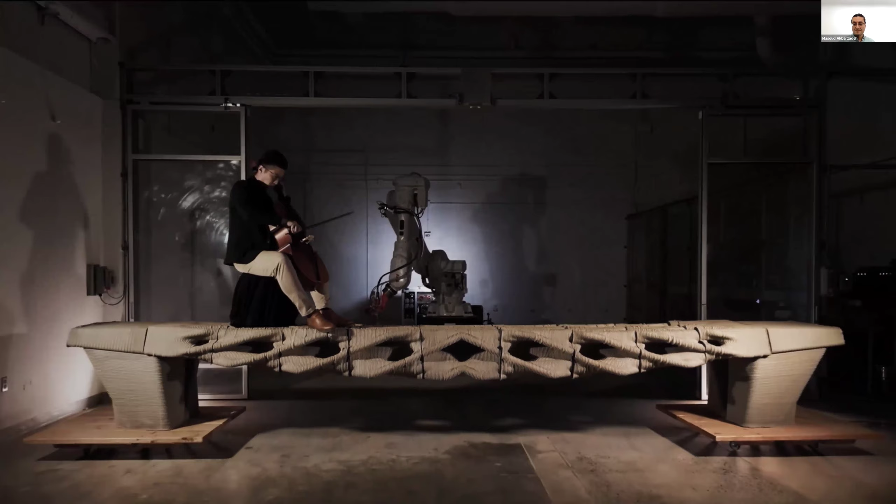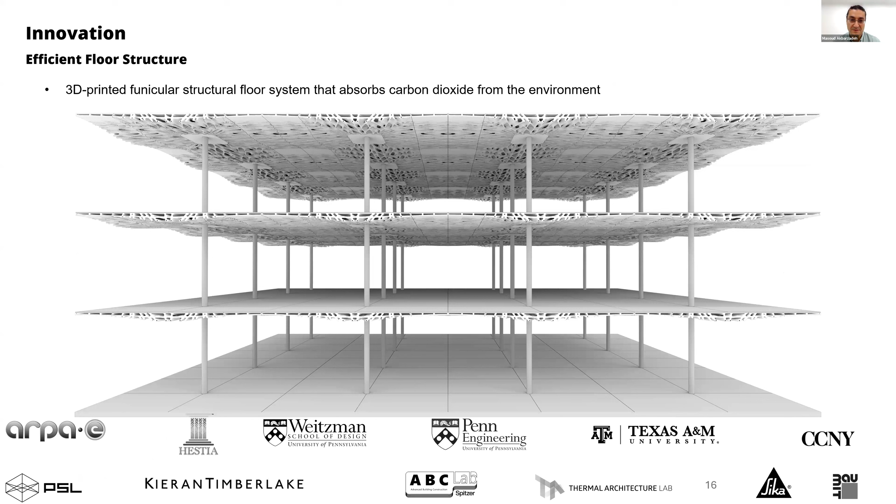This research is at the core of an ongoing investigation, a collaborative investigation between multiple co-PIs and myself, funded by the Department of Energy. What we are doing, the innovation, is that we are looking into a 3D printed structural system that has minimized mass and maximized performance, and that could also absorb carbon dioxide from the atmosphere.

So the innovation is, well, first of all, we have multiple approaches in order to reduce carbon emission. The first approach is the design, and how we can minimize the amount of material we need for construction of these innovative structures.

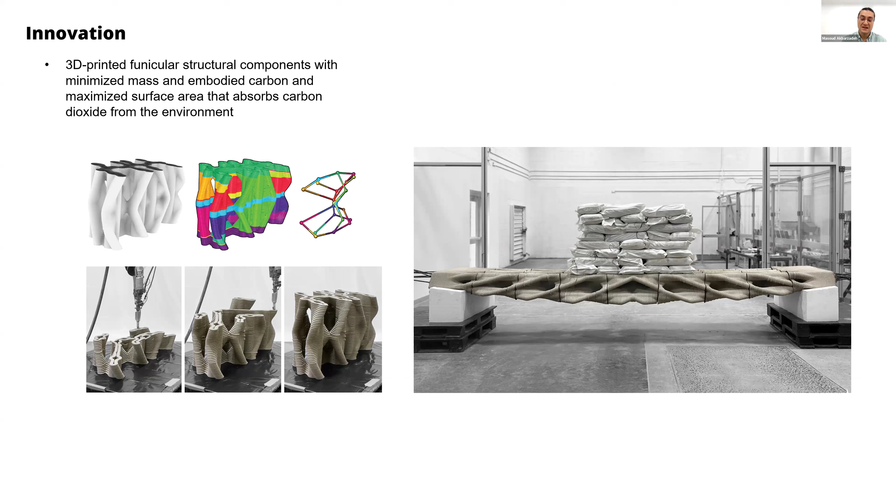We take advantage of concrete 3D printing because it would reduce waste. It would actually add to construction speed. And we can achieve complexities that are necessary for efficient structures.

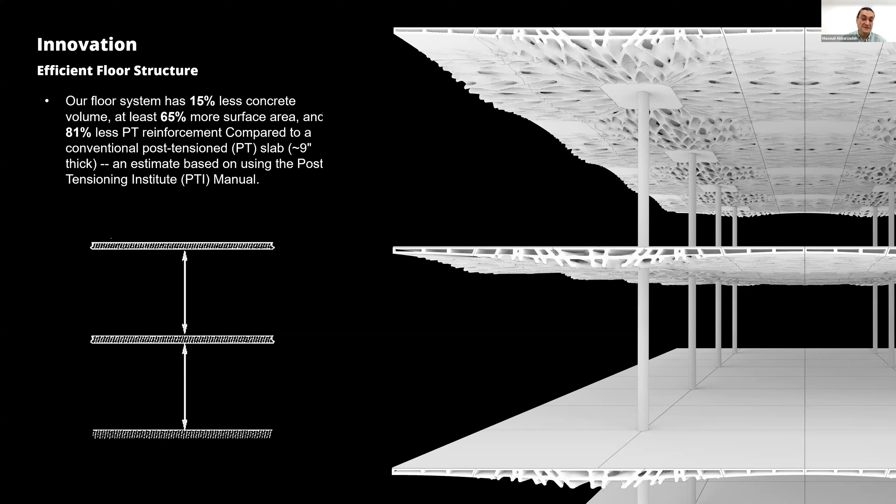If you compare it with the conventional floor system, we can have 15% less concrete volume and 65% more surface area that could be used for carbon absorption, and 81% less post-tensioning reinforcement. This is in comparison with the existing post-tension floor. With conventional reinforcement, we can achieve 57% less concrete and 94% less steel reinforcement.

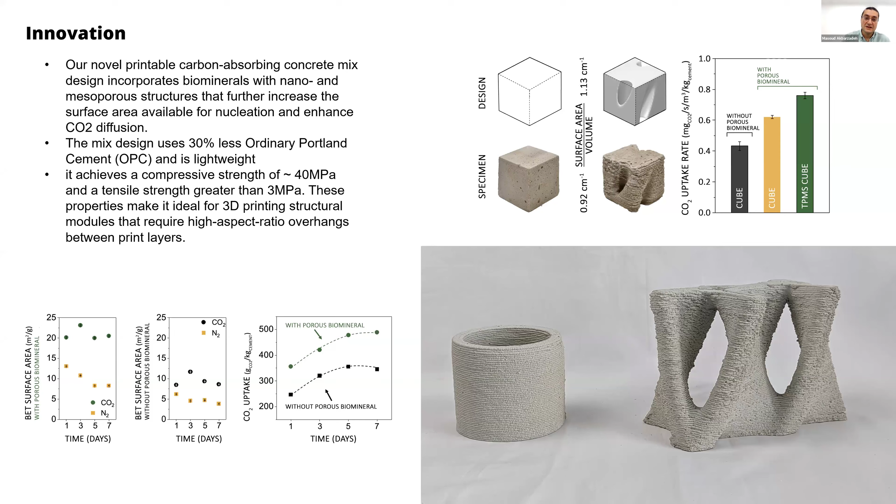On top of that, we are collaborating with Professor Shu Yang from the Material Science Department, who is developing a carbon-absorbing material for the concrete recipe. She's replacing 30% of the ordinary Portland cement with a material that can react with carbon in the atmosphere to maximize carbon absorption, and also minimize the carbon footprint by using less Portland cement.

This structural system that we are proposing has a surface area that is significantly larger than a regular slab, so that can be taken advantage of in terms of thermal performance. This is work that Professor Dorit Aviv is working on and collaborating and contributing to.

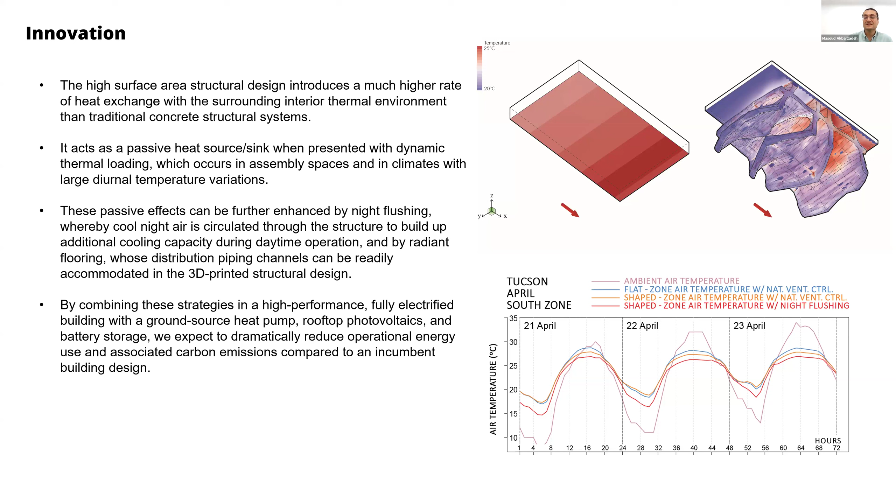And with that high surface area, we can achieve comfortable indoor temperature faster, either in a cooler or hotter climate, and as a result we would reduce the operational energy needed for heating and cooling for the building.

If you look at the entire system, which is recyclable and has minimum reinforcement, you can easily disassemble it at the end of the life cycle and reuse and recycle it. We achieve 60 to 70% reduction in upfront and life cycle embodied carbon, and also around 25 to 50% cost savings in material, labor and energy as compared to an incumbent structural system.

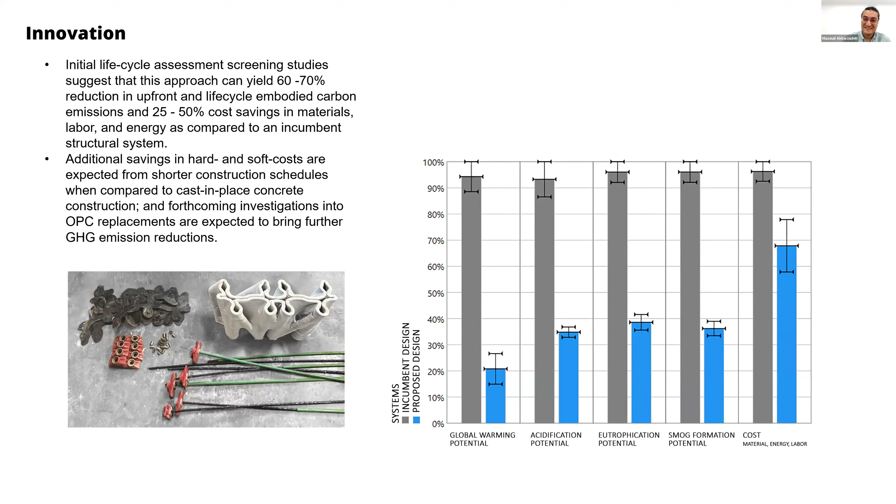Yeah, I would stop here and give the floor to other speakers.

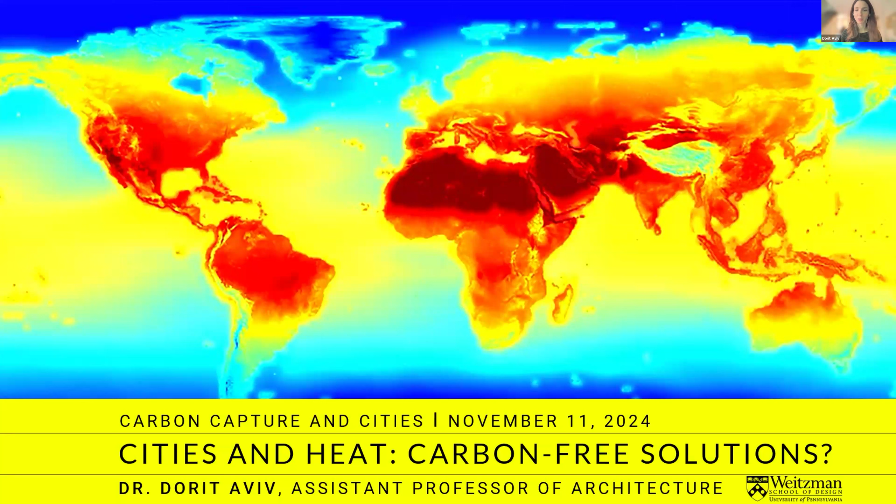One of the things at the core of this fraught relationship between carbon and cities is heat and cooling, and I'll explain. I'm starting with this terrifying image of what the month of July 2100 is going to look like according to NASA's predictions for summer temperatures. In the year 2100, large swaths of the globe will experience extreme heat, but we've had multiple previews of this through deadly heat waves around the globe in the past few years.

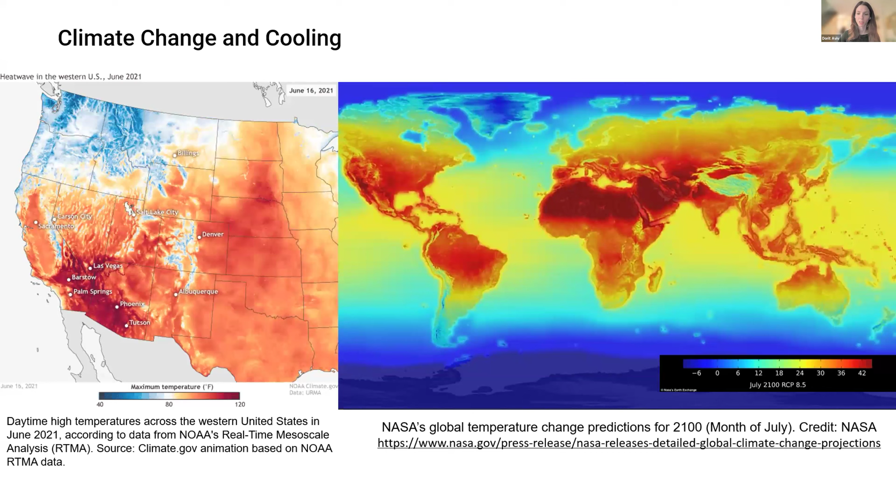To the left, you can see one of those heat waves from recent years in the west of the United States and Canada, where temperatures surpassed 45 Celsius or 115 Fahrenheit. In those extreme heat conditions, there were issues with blackouts because air conditioning energy demand was straining the local grids. And with blackouts and no access for cooling, this resulted in hundreds of heat stress related mortalities.

So cooling is at the intersection of climate mitigation and climate adaptation. Masoud already talked about the need to reduce the building sector's contribution to greenhouse gas emissions. But within that, according to the International Energy Agency, cooling is the fastest growing energy use in buildings. Cooling energy demand is predicted to triple within the next 30 years because of the expansion of air conditioning technology throughout the globe.

So we need mitigation strategies to reduce cooling energy demand, but at the same time, cooling saves lives in extreme heat environments. So what do we do? We need sustainable and resilient cooling solutions that do not rely on fossil fuels or even on the grid, but that maintain healthy, livable environments.

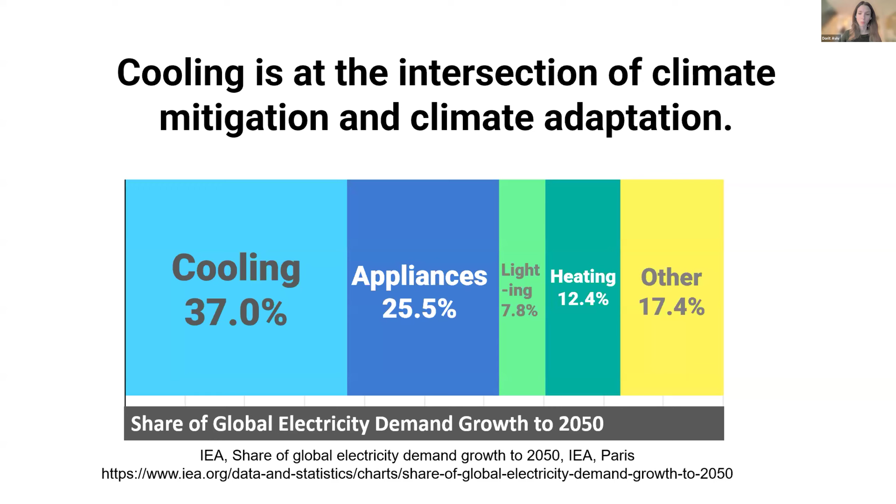This is because of what is known as the urban heat island effect, where urban areas can have much higher temperature than their surroundings. And within urban areas, certain neighborhoods that lack vegetation and shade can be extremely vulnerable to extreme heat exposure.

My lab's research is focused on decarbonization of the built environment, and we work both on climate adaptation and climate mitigation strategies for buildings through design and technology development. But today I'd like to share with you one example of a prototype we built here locally in Philadelphia this past summer, but with implications globally to address these issues.

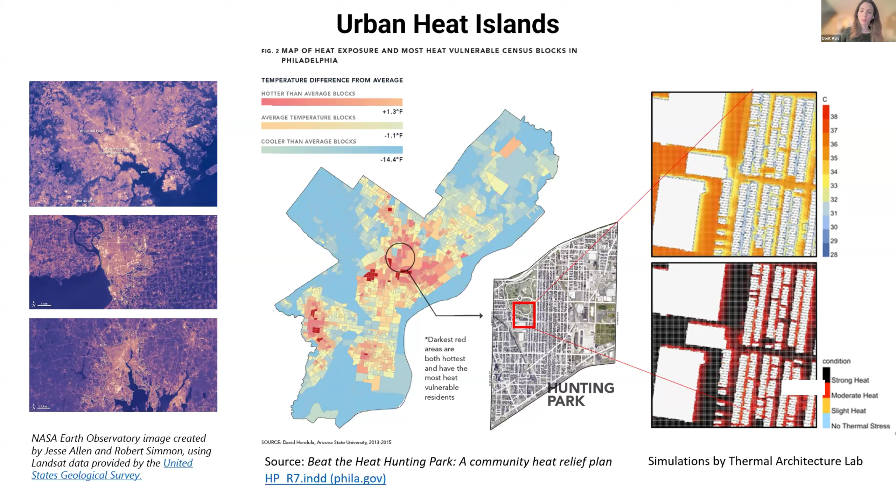We have been working with the North 10 community organization located in the Hunting Park neighborhood in North Philadelphia. This neighborhood is a hotspot within the city, suffering from the heat island effect, with temperatures even higher than its surrounding urban areas. As this past summer marked one of the hottest on record in the city, we all experienced the effect of extreme heat.

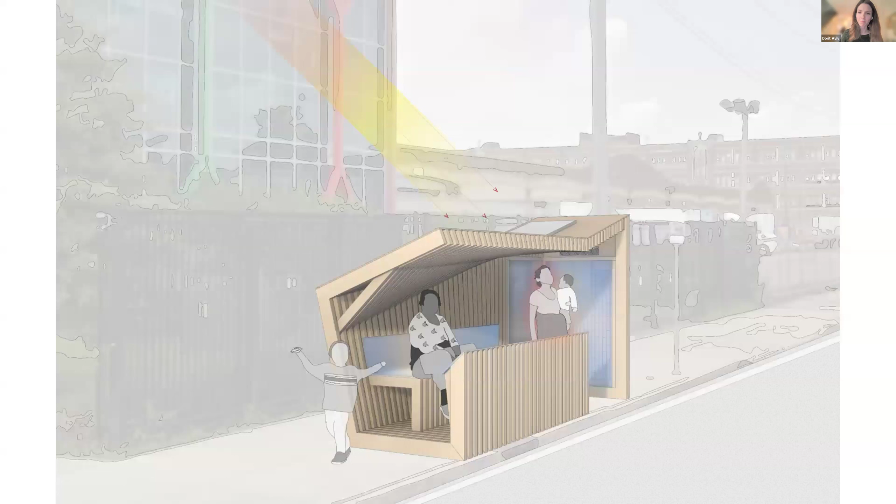But what happens when you have to spend time outdoors for your livelihood in hot streets with no shade? Our proposal was to build an urban cooling shelter that provides relief from heat exposure to people outdoors.

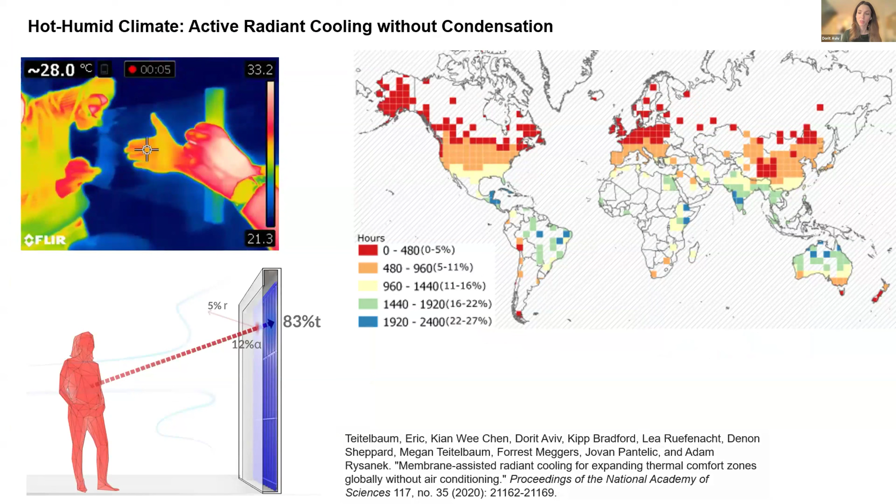We built this prototype using solar power that provides cooling in two ways, both of them low energy and not dependent on air for cooling. One is cooling the bench you sit on, and the other is through radiant cooling panels that you stand next to. Those panels are the result of an international collaboration on expanding radiant cooling to humid climates using an infrared transparent membrane, which separates the cold surface of the panel from the humid air and prevents condensation.

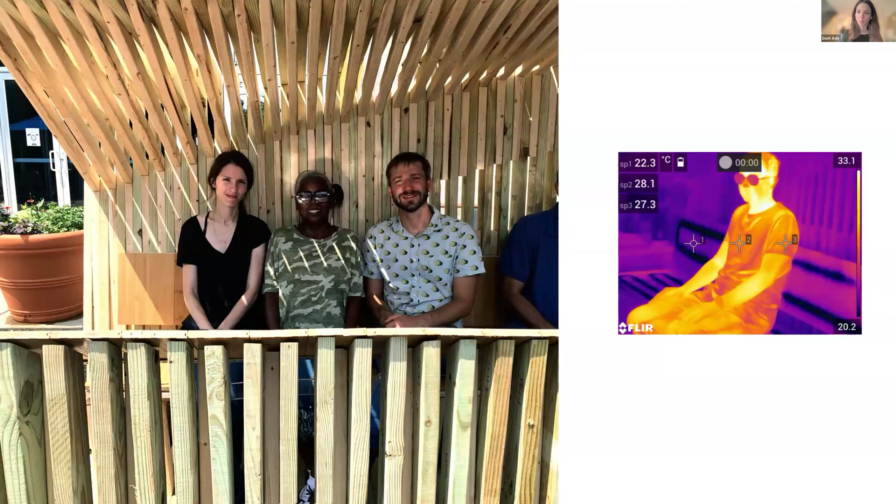Here is an excerpt from a paper we published on how this technology can be used in different regions across the globe to allow natural ventilation and reduce energy use in buildings. We tested this prototype with the community members this summer at North 10, and here's a video published about this project by Penn Today.

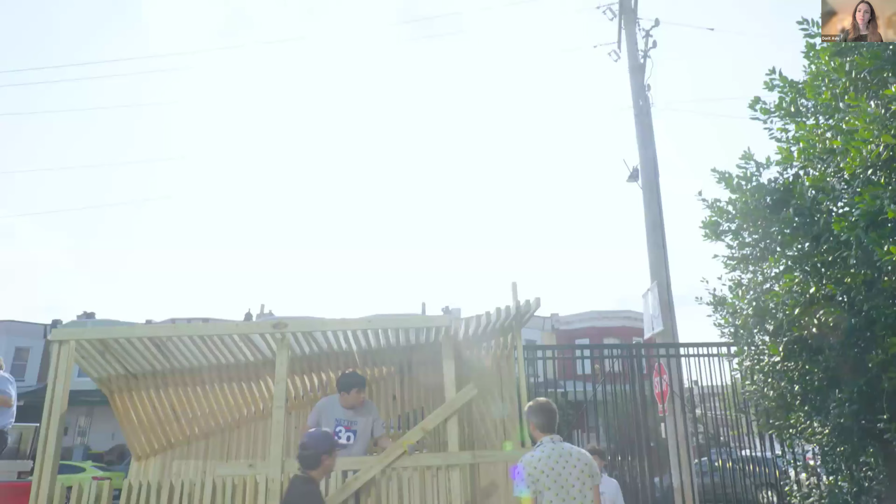The heat island effect is a phenomenon where cities or urban areas are hotter than their surroundings, and there are multiple reasons for that. It's basically how we build cities—we have much less vegetation in cities, a lot of heat absorbing materials like concrete and asphalt, and we design cities with urban canyons that really trap heat in them.

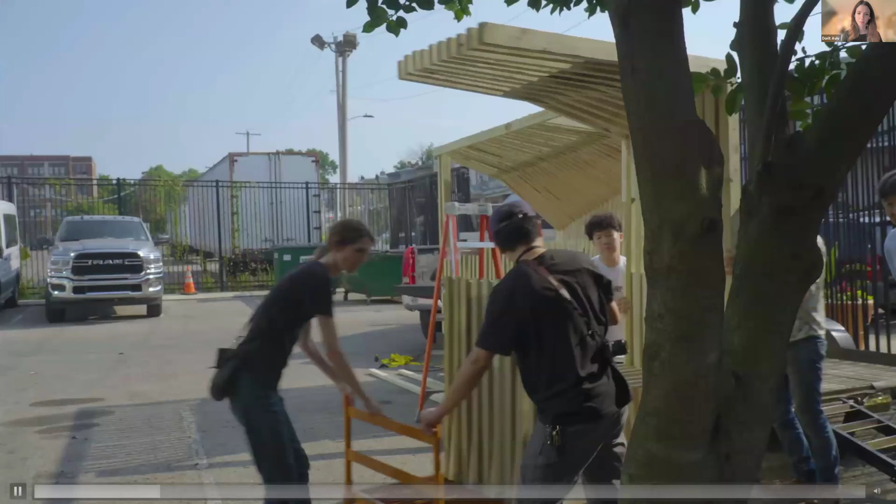Penn 4C has created this collaboration with the North 10 community at Hunting Park, and we've been getting feedback from them and working on developing this cooling shelter. We're testing it at their facility and getting feedback from community members on this pilot structure.

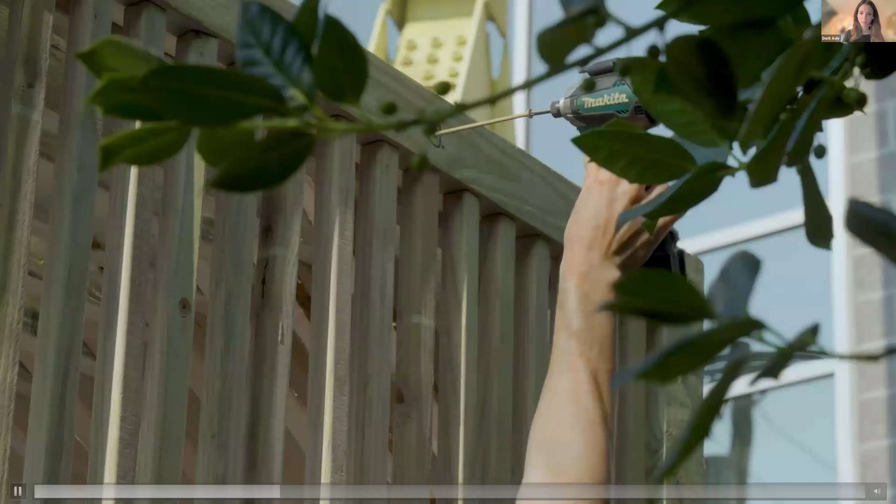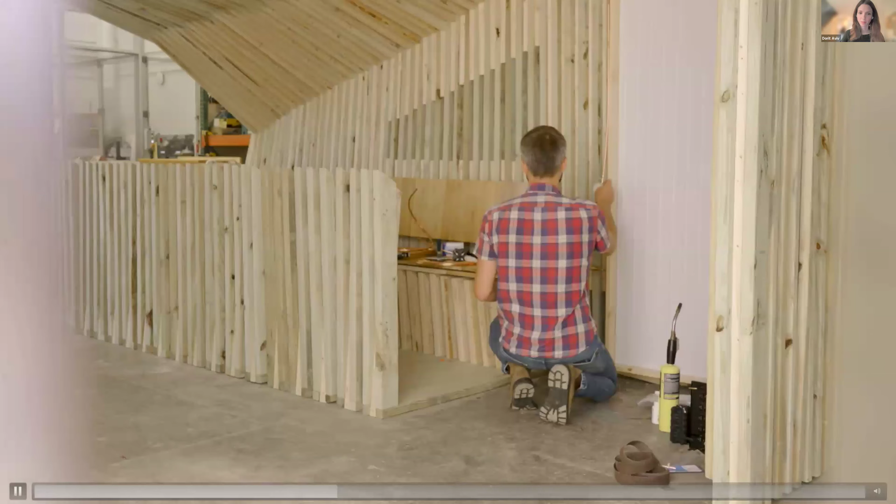We know that heat islands are issues around the city. Unfortunately, right here where we serve in the East Tioga area, it gets hotter in the summertime than other areas. So we decided why not create something where people can comfortably sit and be outside, but the heat won't bother them because it affects their health. So this is how we came up with the idea of a cooling station.

So there's a few components to how this is actually providing cooling. First, simply the fact that it's shading you from the sun—that's already a huge benefit.

Then the bench is actually a cooling bench, which means the surface is cooled by pipes embedded in it. Those pipes are cooled with the heat pump that is powered by the solar panels on the roof. So your body is directly losing heat to the surface of the bench rather than to the air around you.

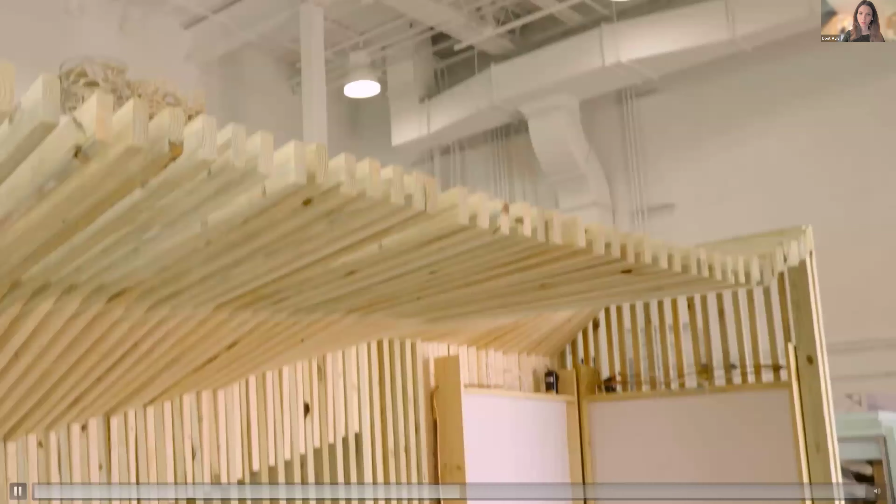The other way we're doing it is if you're in a standing position—over there we have those radiant cooling panels. You don't have to touch them, you just stand, and the fact that you're exposed to them means your body is losing heat to them through infrared radiation.

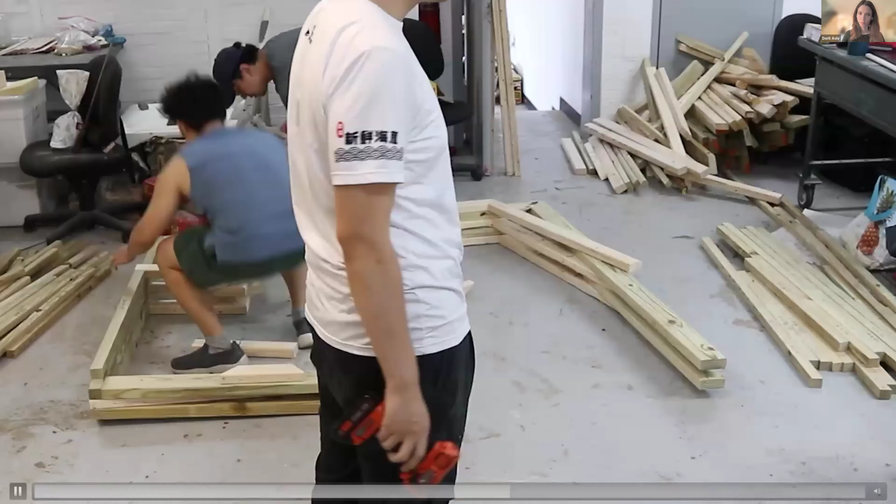In this specific design, we're combining these different technologies together, and everything is energy autonomous. You don't need any external energy source because it works when there's sun, and that's when you need it. The solar panels provide you the energy exactly when you need cooling, which is during the time the sun is really intense.

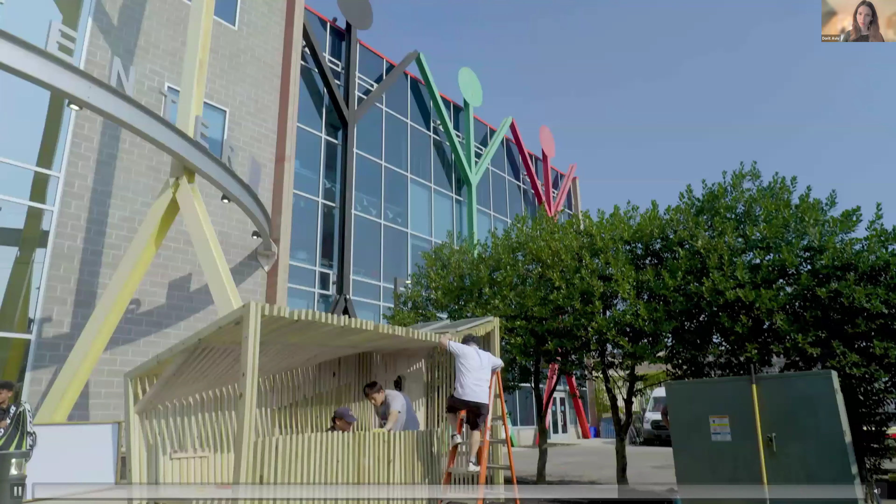At an individual level, there can be health impacts. If you have chronic illnesses, for example cardiovascular illnesses that are exacerbated by being exposed to heat for long amounts of time, that can be worsened if you live in a heat island, or if you're exposed to heat waves and don't have relief in your home for longer amounts of time. If you have asthma or other conditions that might be exacerbated in the context of heat for long periods of time, you too might be more vulnerable at an individual level.

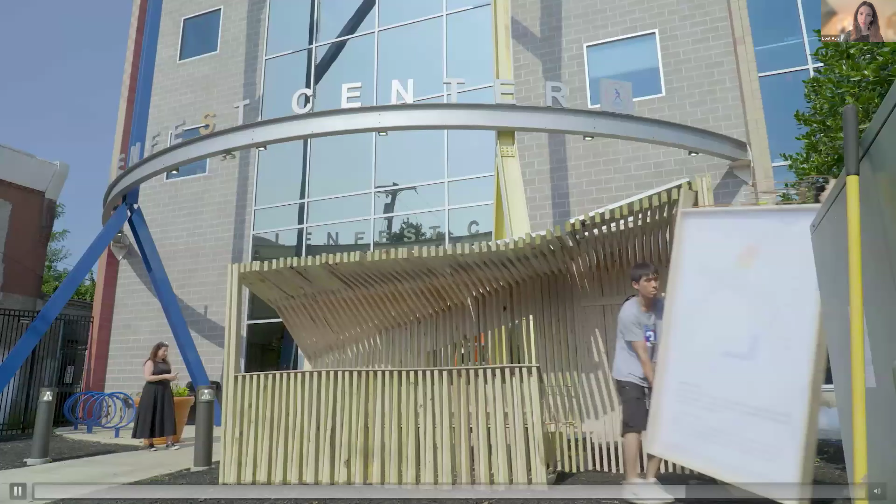There are also public health issues that are exacerbated by heat. For example, there are associations between higher heat and firearm crime and violence, which are other larger public health problems. My background is public health, and we realize that very disadvantaged communities of color are always the ones that have all these inequities, and part of that issue is health inequities.

As we know, this area has one of the highest asthma rates among youth. African American men lose their limbs more than other races. This is the highest district that we're living in. So we look at the social determinant of health model that says people are not healthy because of all these reasons, so we need to work hard to see how we can push back on the determinants.

So my hope is that this project will be another opportunity, even if it's just as simple as sitting in a cool space, to make sure that someone is feeling safe and feeling better. When you feel better, your health is better.

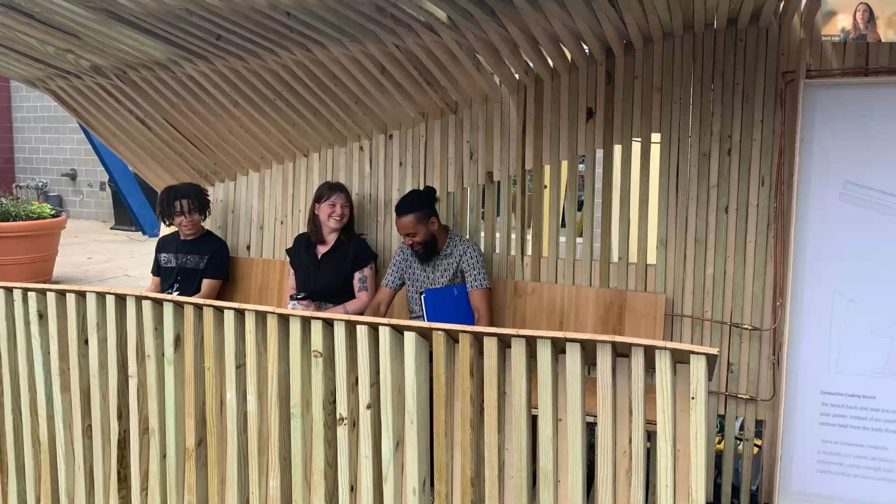So we hope this one prototype built locally can be replicated and applied in urban areas across the globe. We're actually working on the next phase of scaling it up right now. Thank you, I'll pass it on.

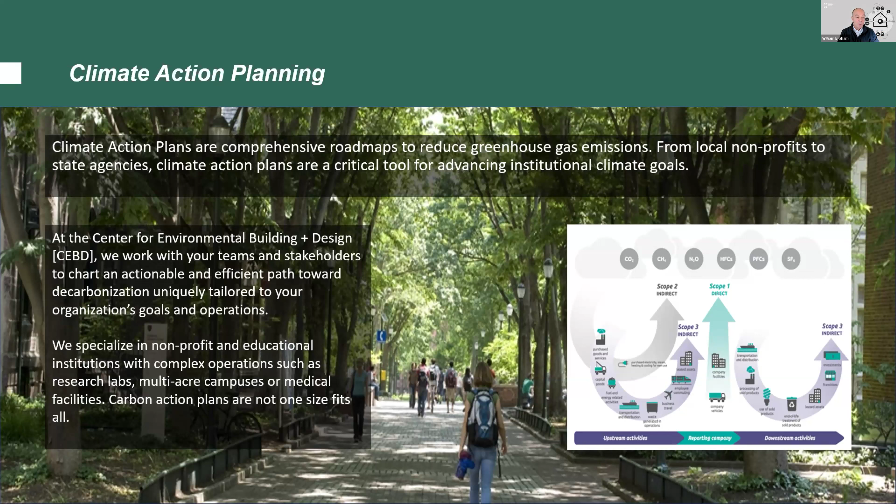Building on that, priorities are quickly established: what things need to be replaced, either finding cleaner sources of power, or swapping things out. The fact that we're able to come in and get people a clear picture has proven tremendously useful. That doesn't reduce the work that has to be done. In many cases, we work with the client, and then 2 or 3 years later, they're coming back and saying, okay, now we're ready to replace that oil burning furnace, or to think more critically about these other elements.

We've worked with a bunch of different institutions, starting with Penn and some Penn affiliates. We're actually now negotiating a contract with the city of Philadelphia for all their municipal buildings and expanding out. This has been a good scale of work for our architecture students learning environmental action, and it's a really useful scale of analysis, because while we can talk about these things at the policy level, and we need policies to help guide them, this is often the level at which the actual decisions happen - how budgets will be mobilized, who will pay for what, and how things actually happen.

Second scale - I'm going to shift 3 times today. We've also been working for 15 or 20 years on a form of environmental accounting called emergy synthesis. It's a form of life cycle accounting that is complementary to the conventional forms of life cycle accounting, which are what we call damage-based, looking at future damages that could be caused. We saw some slides shown in previous examples. This one looks at the work and resources it requires to do anything, so we would call it a donor-based system.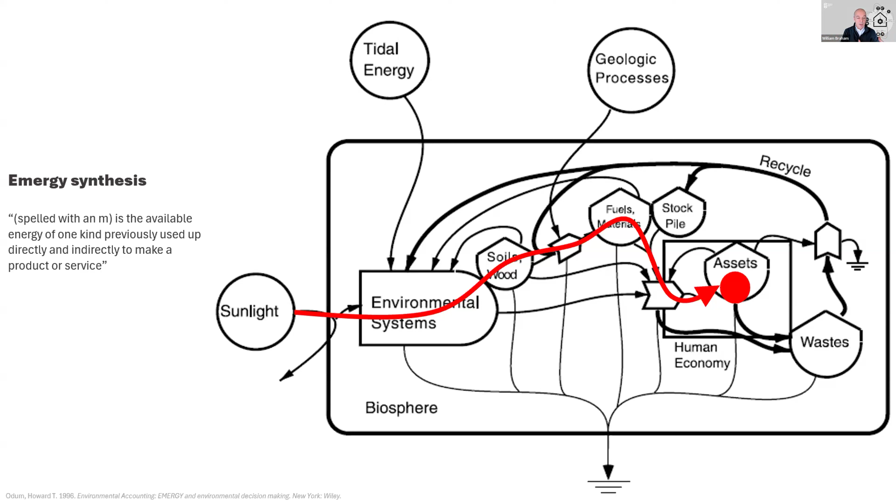In particular, we were interested in topics we've learned about through conventional life cycle accounting, such as the incredible carbon cost associated with concrete, which is one reason we've heard a couple of references to working with concrete. So we did a whole series of analyses on how to take life cycle accounting data that exists for those accounts and expand it to this broader form of analysis, which in particular adds the work that the geobiosphere had to do to produce the things we then use in the human economy to do other work.

Without giving you the whole body of research or paper, we looked at a comparison between a couple of different structures: an all wood timber structure, an all concrete structure, and a couple of variations of that. This reinforced exactly what other forms of life cycle accounting have shown, which is that wood sequesters carbon and is less carbon intensive per functional unit than concrete. There's a lot of reason people are focusing on innovative ways of looking at concrete, but in addition to carbon, there are also a number of other questions and issues that arise from this form of analysis. I've highlighted here the materials, primarily the sand, that is required for concrete.

I was very excited to hear the mention of synthetic aggregates in the first talk, because once we get to the limit of current sand resources on the planet—and we are getting there—in many locations sand is becoming scarce. And in current forms of making concrete, there's no way to recover that.

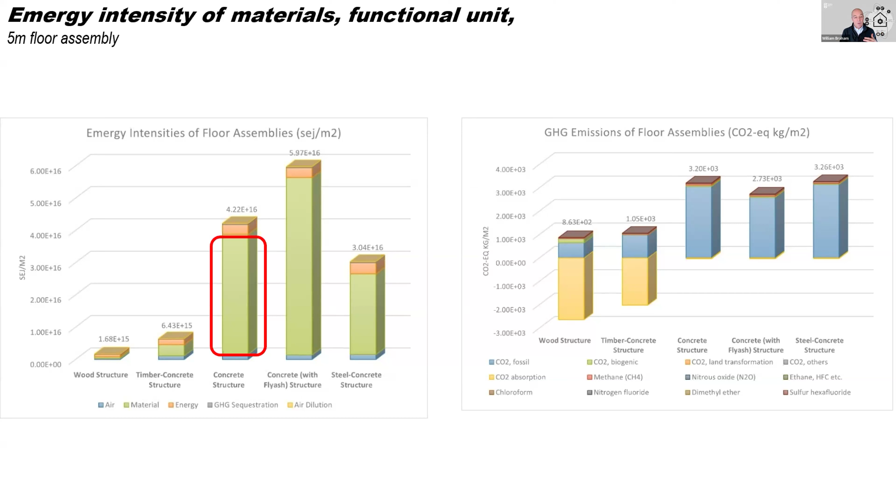So two possible paths there. One, synthetic aggregates coming out of waste streams sounds like an extremely exciting possibility. And two, this is speculation on my part, is there any way we could recover that sand from concrete once it's done?

And then the third scale, building scale, which is where we're architects, it's where we spend a lot of our time thinking. This really looks at two questions that come up for architects now. One, which has become very much part of contemporary practice, is the balance or trade-offs between operating energy and embodied energy—or embodied carbon and operating carbon. The carbon released because you heat, cool, and light your buildings, versus the carbon bound up in the materials and construction and everything it takes to put the building in place.

But then the second issue we've increasingly faced is once you get to very low and zero energy buildings—and that's not that hard these days, a zero energy building is becoming a regular design goal—how do you decide which building is better than another? How do we begin to make design distinctions?

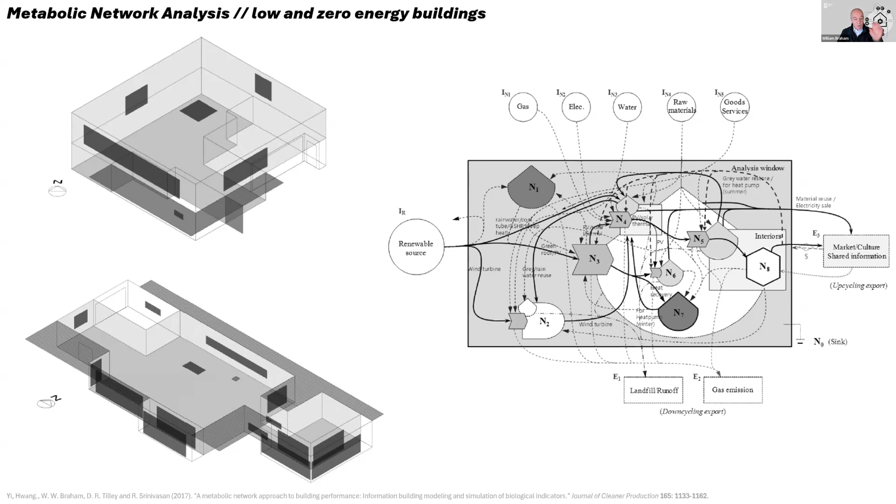So taking those two problems, we've been looking at a form of what we're calling metabolic network analysis, looking at the building and everything it does as a system. I invest in walls, insulation, and windows, and that provides certain comfort benefits or lighting qualities. So I'm looking at quantities I invest in on one side and services I'm providing on the other.

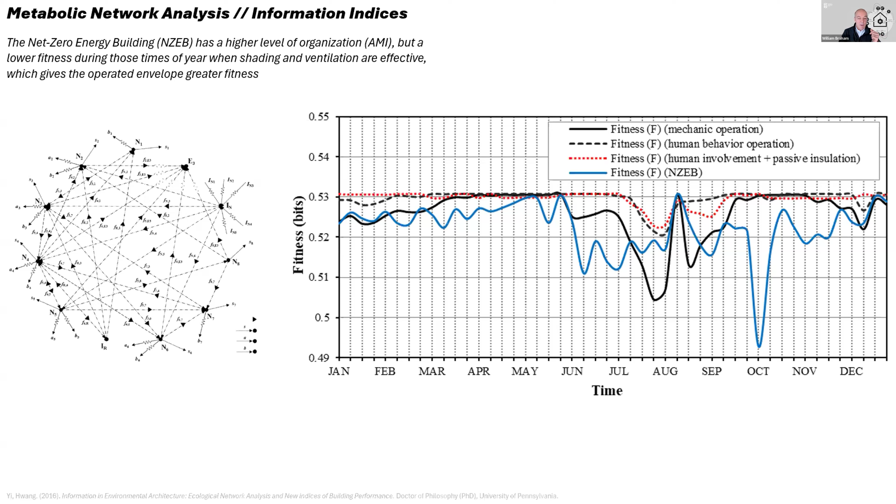Without explaining this in great detail, we've adapted some work from ecologists using information indices, information measures, to understand the value of different things. The chart I'm showing, which I won't explain, but the really interesting measure that's come out of this is similar to resilience, but not exactly the same—it's fitness. What we're seeing is incredible fitness benefits when we take a reasonably well-designed building and tune it to respond to its environment, tune it to read and understand what's happening around it.

And I will leave it there. Thank you.

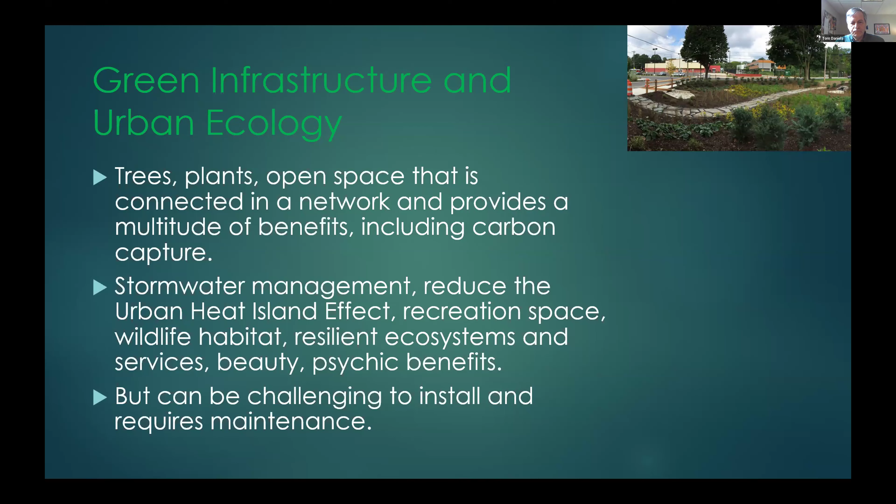Green infrastructure is also, as we're seeing, vulnerable to drought, such as the drought we've been experiencing for the last month or so here in the Northeast. And also, it is vulnerable to pollution.

One of the major challenges we have is the loss of tree canopy. Trees are wonderful for capturing and storing carbon. Tree cover in urban areas in the United States is declining at a rate of about 175,000 acres a year, or about 36 million trees per year. Street trees, of course, have a shorter life than trees in the forest.

Trees capture carbon dioxide through photosynthesis and release oxygen into the atmosphere, which is a good thing for us. Here in the United States, trees throughout the country are a carbon sink and offset about 13% of U.S. greenhouse gas emissions. Researchers believe this percentage could be increased to as high as 20 to maybe 25%. But tree density is key for carbon sequestration and storage.

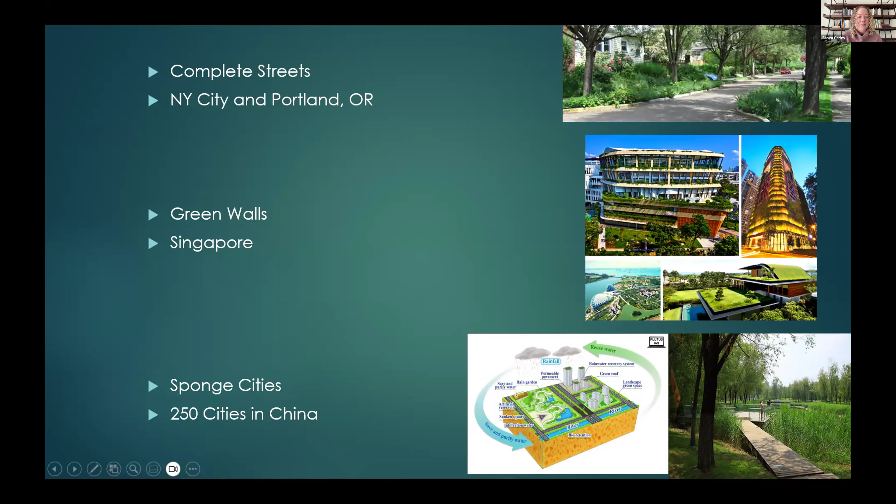So at this point, we're going to open it up to Q&A, and I am going to kick us off with a question or two, but I encourage everybody here in the audience to use the Q&A function to drop questions in, and I'll start monitoring that and pulling from the questions you drop. So panelists, I'd like to kick us off with the question of whether some cities are better prepared or better primed to be leaders in the carbon capture space, and what is it about these cities? Which factors essentially lead them to be leaders?

Jen? Yeah, I'm happy to kind of take the first shot at this one.

Thank you, Sanya. One thing I think could be an indicator of that is looking at, as Tom mentioned, with CARB in the state of California, there's incentives to do nature-based carbon removals, and there's even a quantification framework in place. So I think states that have net zero greenhouse gas goals, but also 100% clean electricity goals, are going to be states thinking ahead about these types of incentives. In addition, some states have buy clean incentives, like New York State, and this goes back to Scope 3 emissions. So if there's an opportunity for states to develop subnational policy associated with incentives for procuring low carbon supply chains required for building construction, like cement, concrete, and steel, those are great places to begin some of the work.

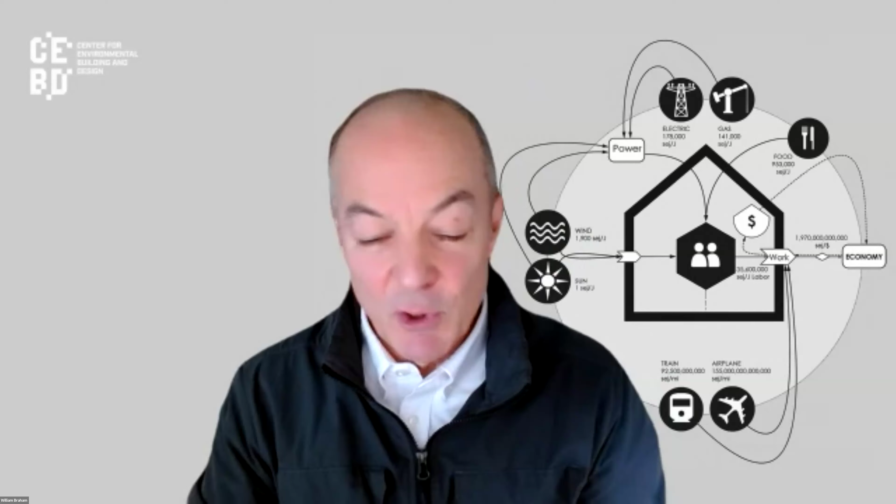I think either— Oh, Bill, you want to go first? Sure, I can jump in. Well, we've seen both Swarthmore College and Princeton University put in large geo-exchange wells. Geothermal is actually a little bit of a misnomer—geo-exchange wells. And the advantage isn't just cool water. In fact, the advantage of a geo-exchange well in this climate, and we're talking wells going down a couple hundred feet, is that we have two seasons.

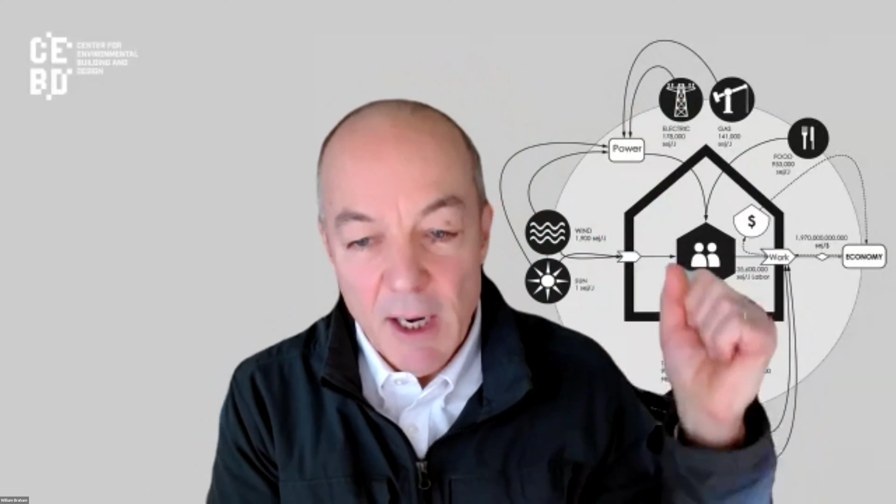So in the winter, you're able to pull heat out of the ground, and in the summer, you push heat into the ground, essentially using the ground as a giant battery. So both those institutions have gotten rid of, or are in the process of getting rid of, their fossil fuel burning central plants and replacing them with well fields—these geo-exchange well fields with heat pumps that then provide all their heating and cooling. So it's a great technology in this area at scale.

There's two follow-on questions, Tony, I suspect. One is, why doesn't Penn do this?

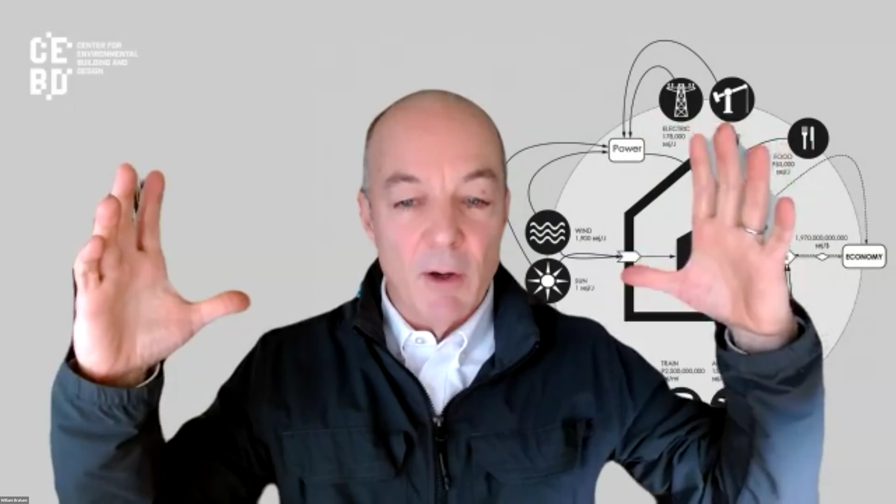The thing about geo-exchange fields is that they're using pipes of warm and cool water that are huge, whereas here at Penn, we're in an urban setting, which for over 100 years has had steam pipes underground, and the steam pipe is much, much smaller. So it's literally physically impossible for a place in most cities to switch from steam to chilled or warmed water.

And then the last thing is, recent advances, certainly at the household scale, have made it mostly more economical, and the performance has gone way up to use air source heat pumps than ground source for houses. Still, ground source is still a great technology in this climate, but if you're just looking at costs and efficiencies, we're seeing air source—meaning it's like your home air conditioner, it sits outside and exchanges heat with the air—that those are actually now incredibly competitive in terms of performance, and obviously much less in price.

I can just add that with geothermal, the deeper you dig into the ground, the more efficient or effective you are, because the temperature of the ground is getting increasingly stable as you dig deeper. But that's also a challenge because there's a scalability challenge of at what scale does it become actually efficient that you dig deep enough to make it something you can use year round efficiently for your heating and cooling.